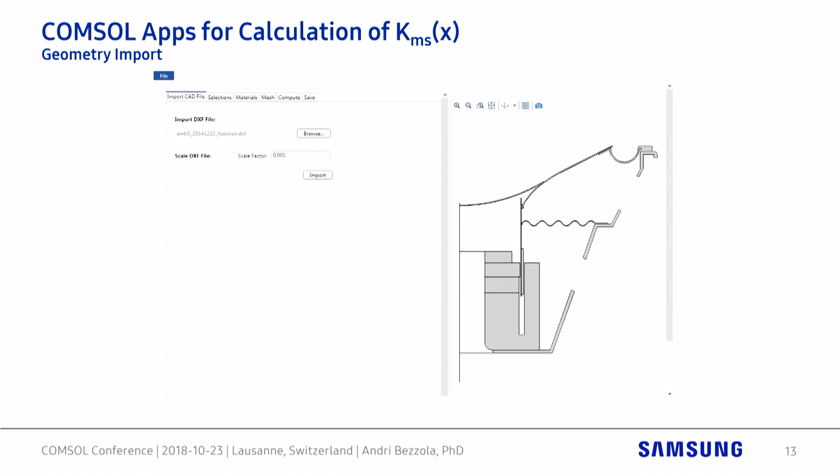So I built a COMSOL app that's on our server for our transducer engineers that design these transducers day in and day out so that they can get these curves really quick. So this is a simulation tool for the stiffness where we import a geometry, we assign the selections, and today I just learned in a mini course there's some ways that we can probably optimize this already. So I already learned something today to make this app better.

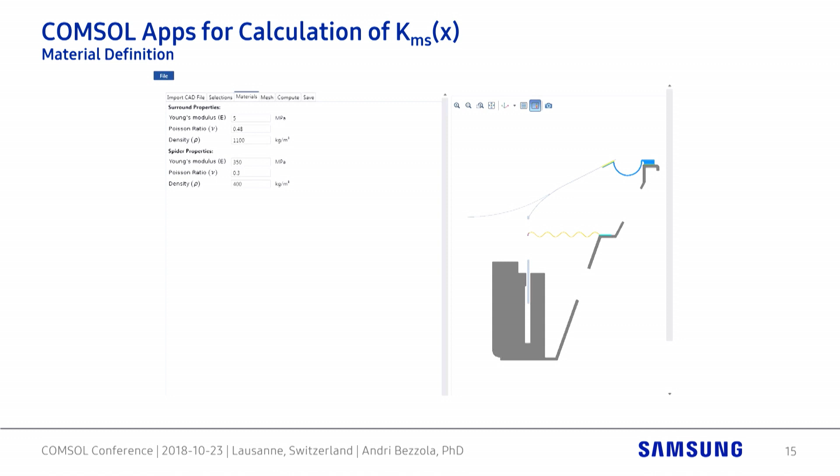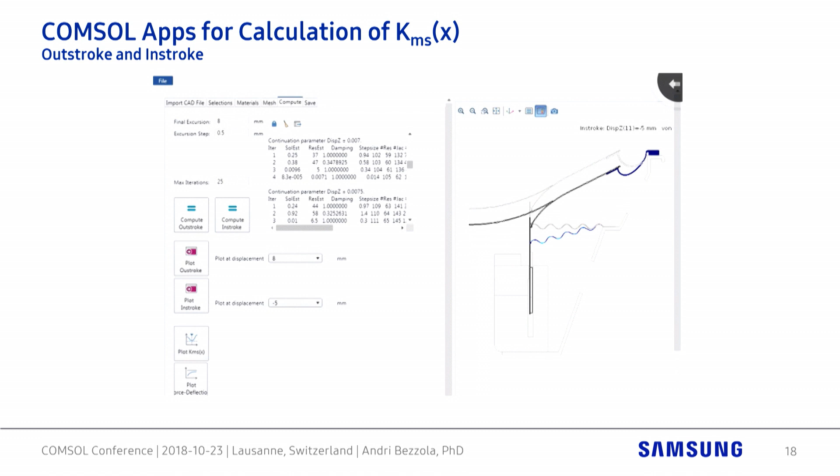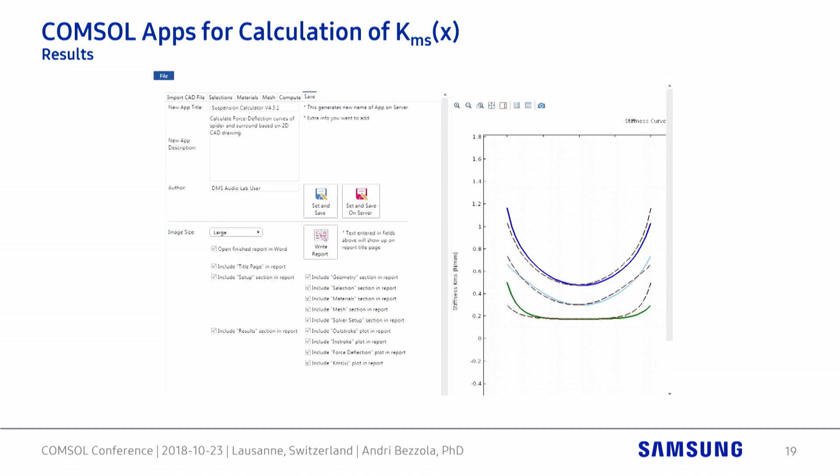We assign material properties, we can mesh it, and then we solve it for an outstroke and for an in-stroke. We assign a displacement and calculate the force that's required for the displacement, and we get the stiffness curves here divided into the stiffness of the surround, the stiffness of the spider, and then the total stiffness is just a combination of the two.

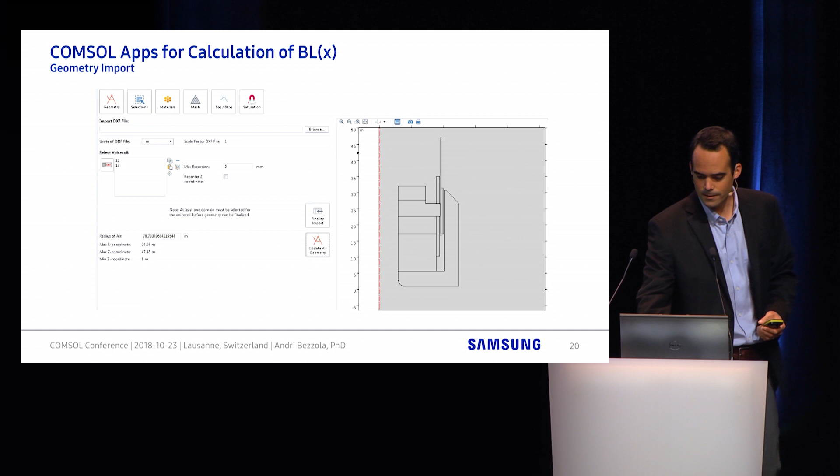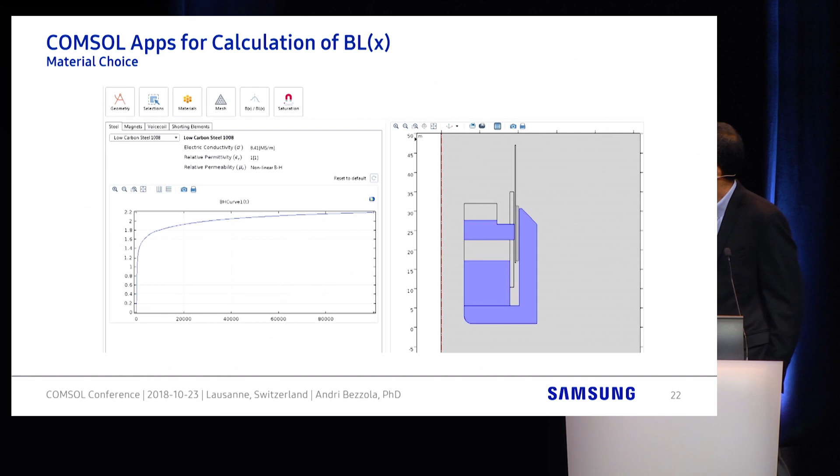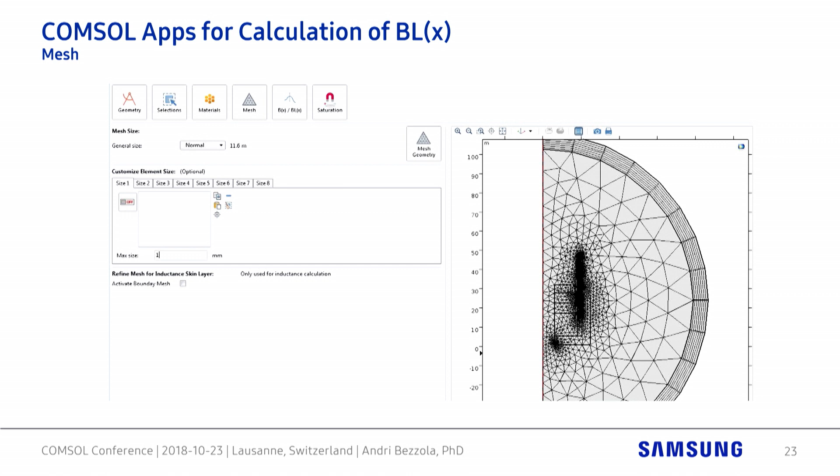Similar for the BL, the force factor that's acting on the voice coil. There's an app, again, we import a geometry, define the selections, assign materials, and here you can see we use nonlinear steel. Here, this is the saturation curve of steel for the steel 1008. Then we mesh it, and we can calculate the B field in this transducer.

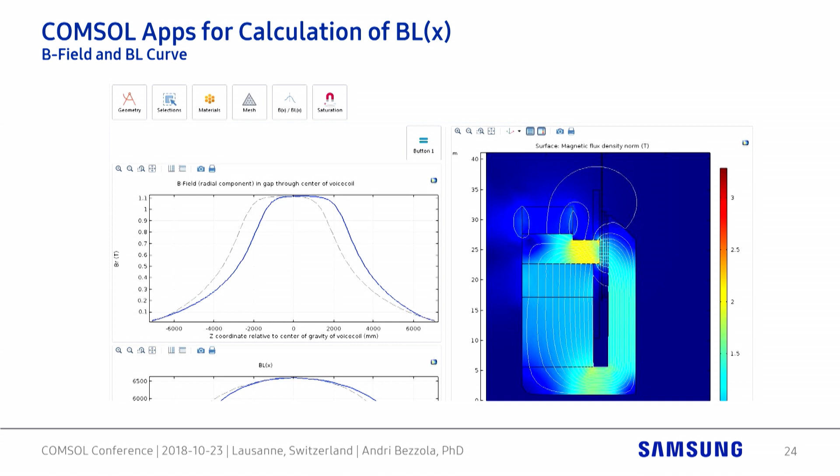And from this B field curve, which is the strength of the magnetic field here in the gap, we can integrate over it and get the BL curve. We can also look at saturation, which is something that's really hard to do experimentally, if not impossible. We can look inside and see, okay, do we have saturation in steel at certain points? And we can look at, okay, what is the operating point of a magnet? Do we utilize the magnet to the maximum efficiency?

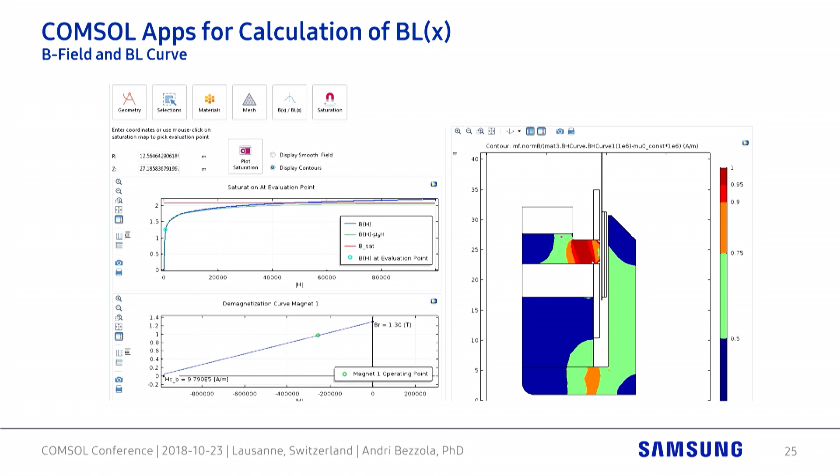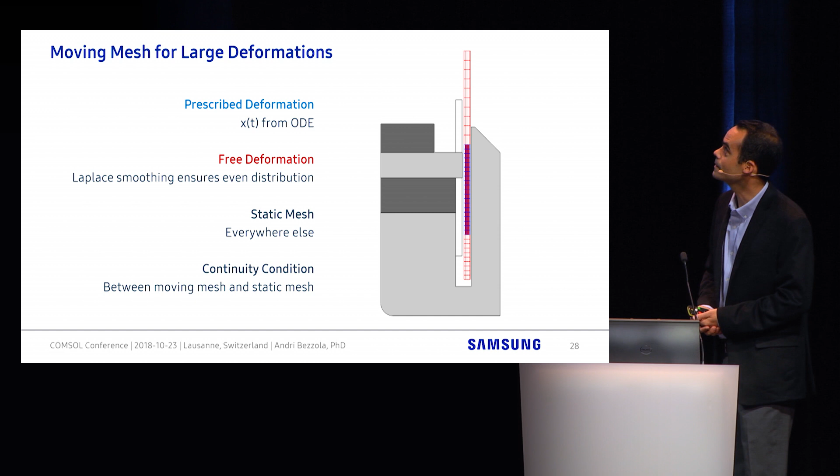So because we have large deformations, my first approach was to use a moving mesh, and there's actually a nice tutorial on COMSOL on how to do this, which I found 2 years after I had to model this. So this was 2 years ago. And then I found a tutorial, and I was like, oh, that's nice. Somebody put it in a nice form and explained how to do it.

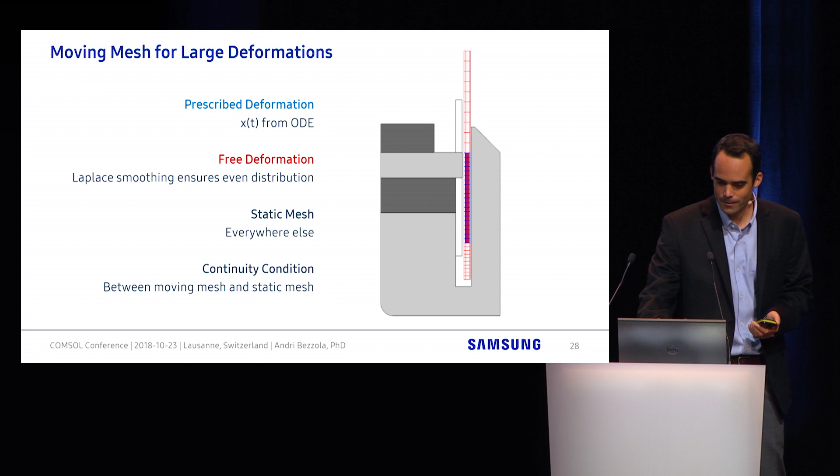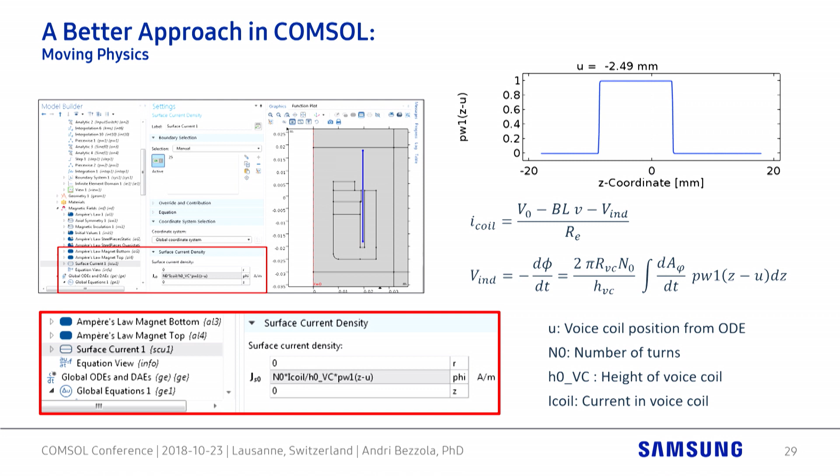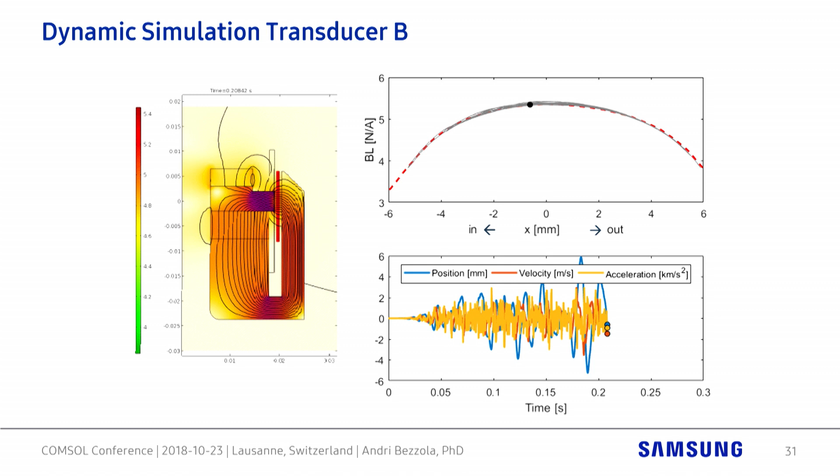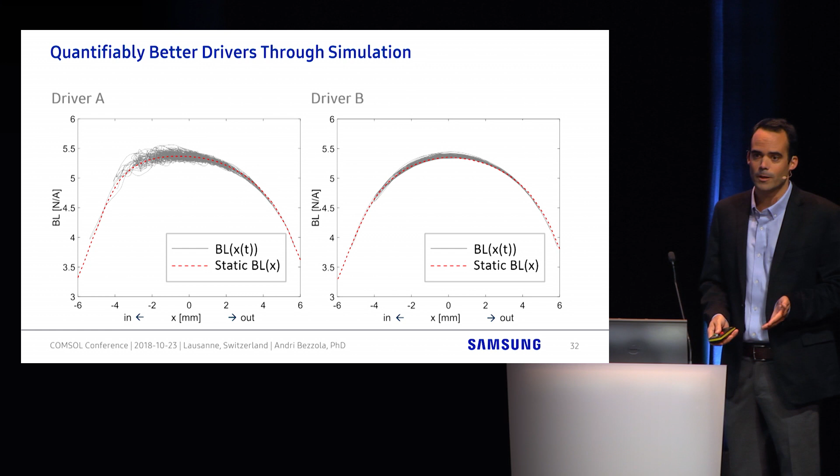Then transducer engineers that are here in the room probably know, well, we can use shorting rings, that's these 2 squares here, that absorb the induced currents and don't affect the B field as much. And you can see if we do that, then we get an instantaneous BL value that's a lot closer to the static curve. So in trying to use nonlinear control, we're actually a lot closer to the truth in this case than what we were before. All right, and here's just a comparison, and you can imagine that the driver on the left probably doesn't sound as good as the driver on the right.

All right, that was the first example. Next example. I need to hurry up a little bit. Samsung has developed these giant LED TVs that are now for sale, and you can buy them for your living room if you have deep pockets. And they look great. But we were tasked with developing an audio solution for this case where they wanted the loudspeaker to be really shallow and fit right next to the TV.

The technology for the TV comes from LED cinema, and actually there's one of 4 LED cinemas worldwide in Zurich that you can go and check out. And the audio requirements are pretty stringent. We need a very wide sweet spot, so we need to cover a wide audience, and we need to cover also an audience that's close and far away. So there's a vertical control that we need to have as well, acoustically. And they must be able to play at really high volumes.

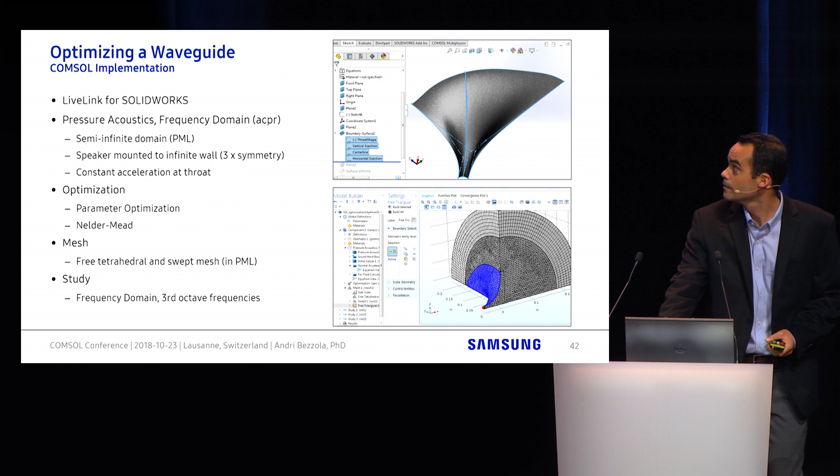So this is probably what's more interesting for you guys. We used LiveLink to COMSOL, to SolidWorks. And then we used just a simple pressure acoustics module, where we assigned a constant acceleration down here at the throat where a driver is producing the sound. And also we made good use of symmetry, assumed that this loudspeaker is built into a wall, so we used 2 pi conditions. And there's some other interesting facts here if you want to read.

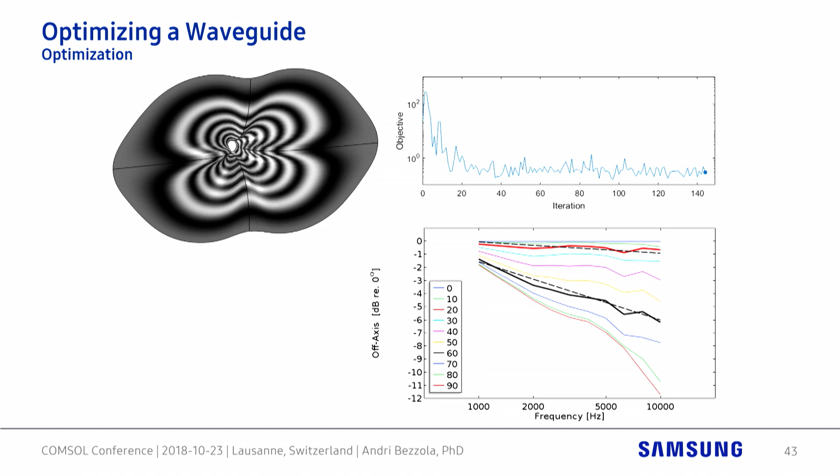And this is how the optimization performed. You can see that the objective here, getting close to those straight lines, is converging pretty fast and then kind of starts dancing around. That's a feature of the parameter optimization with gradient-free solvers that we used in this case. And it's just kind of tweaking little bits, really trying to get this black line here and this red line to match up with the targets.

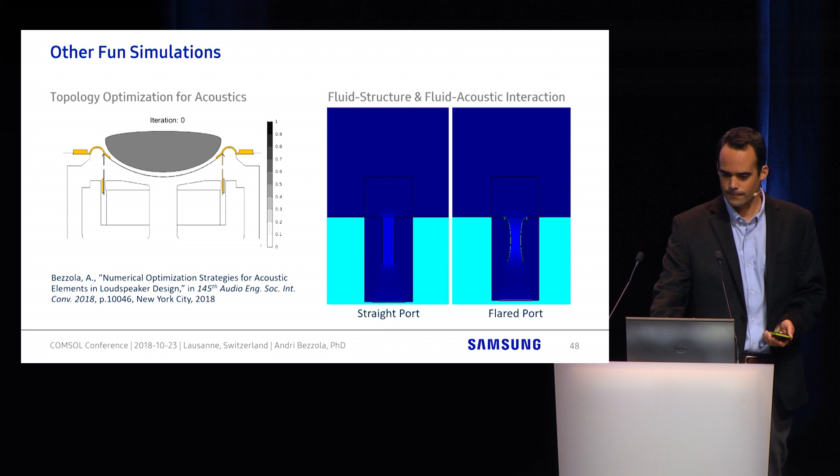All right, that was the second example. These are a few small simulations that we're working on and we're interested in, and hopefully I can learn enough here at the mini courses to actually get a good implementation of both. One is topology optimization for acoustics. You see an example here. I actually presented this last week in New York. And the other one will be turbulence in ports. So here we have a straight port that produces a lot of turbulence, and this is a flared port that seems to work better. But these results are not very physical. I didn't do any verification. I'm not sure what you see here is actually what would happen in reality.